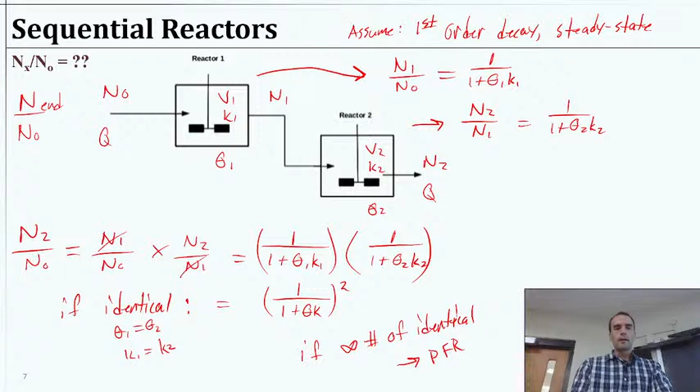We also talked about the sequential reactors, comparing that to side-by-side reactors. Talked a little bit about that problem. I'll make a comment on that in a minute. But this is just another portion for our slide there. Okay, and I need to bring up my calculations too.

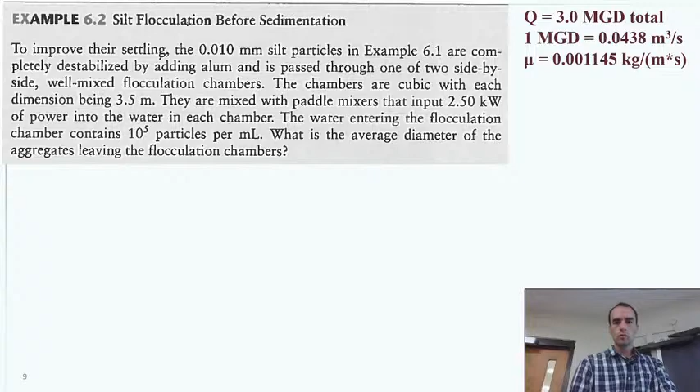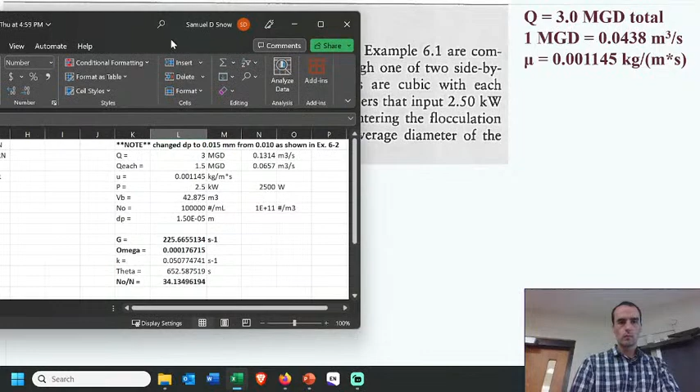All right, so you should see kind of what I have here. Let me make it a little bigger.

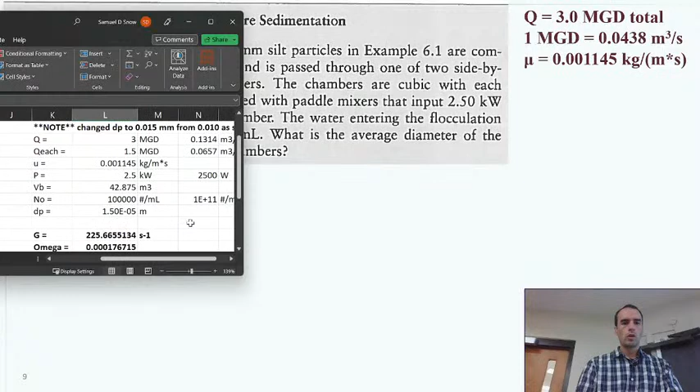You see I had Q, and I solved for that Q, halved it first, and then converted it to cubic meters per second, given the conversion factor we were given.

I just wrote up our value for our dynamic viscosity that was given. Our power, we needed to convert from kilowatts into watts, so that would be 2,500 watts. The volume of the basin is just 3.5 cubed, which is 42.875 cubic meters.

And we were given an initial number concentration of particles, I think 100,000 particles per milliliter, or 10 to the 5th. Now we actually have to convert that per milliliter into per cubic meter in order to get our units the same across different pieces. So when we initially said n naught was 100,000, we actually have to convert that to 1 times 10 to the 11th particles per cubic meter.

Then we can relate the meters across in order to solve our omega properly. Okay, so the last thing I'll say is we had our diameter of the particle. That was 0.015 millimeters, which becomes 1.5 times 10 to the minus 5th meters. So I've got that there.

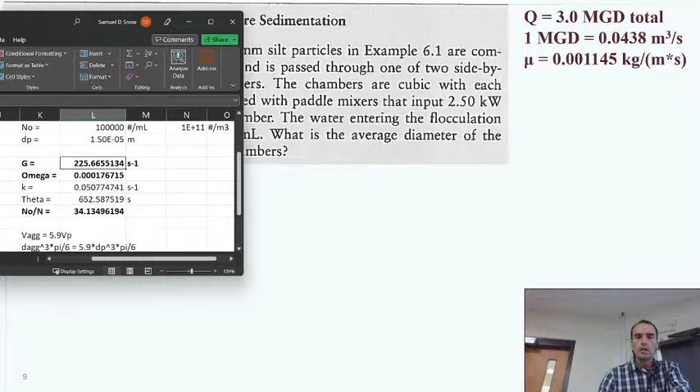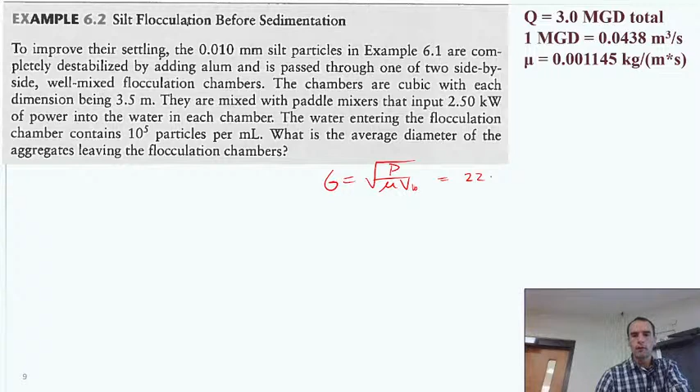So then we go on to put these into play. And so for our G, we would say G is the square root of the power input divided by the dynamic viscosity divided by the volume of the basin. Putting in the 2.5 kilowatts and converting that to watts, we should get, what was it, 225, I believe, or 226 per second. Yeah, 226.

Okay, so that gives us G. The next thing we need is our omega. This is the floc volume, right? So this is the volume of one particle times the volume of all the particles, or the number of particles per concentration. So this is going to be the N naught times the diameter of the particle cubed times pi over 6.

So when we put that in, recognizing that we need the diameter in meters and the number concentration also in meters, that should then give us this value here, which I'm going to convert to scientific notation. So 1.77 times 10 to the minus 4.

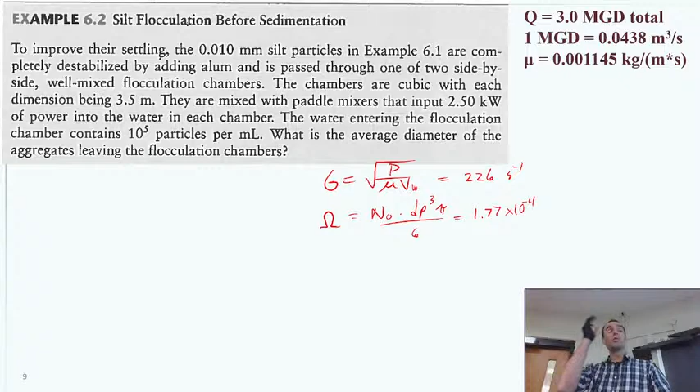There's no units on that one because it's just a portion, right? It's like 0.0177% of solution is particles.

Okay, so then that gives us the ability to solve for K. You recall that's going to be the collision efficiency. The collision efficiency was inferred to be 1 because we were told it's completely destabilized. If I can find the cursor... that tells us that this term is 1.

If it was partially destabilized, then we would need to find some number for that, or be given a number for that. Okay, so we've got that times 4.

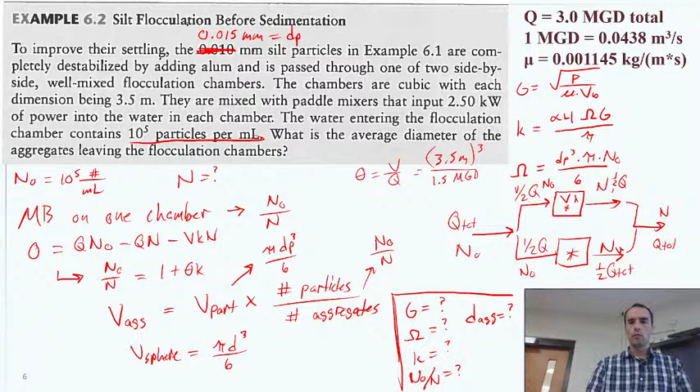What is this? This is times the G. And just so I don't forget, yeah, 4 omega G over pi, that's right.

Okay, and given that, we can add in all of our pieces and say, when we solve for K, that K is going to be 0.05 per second, maybe 0.051.

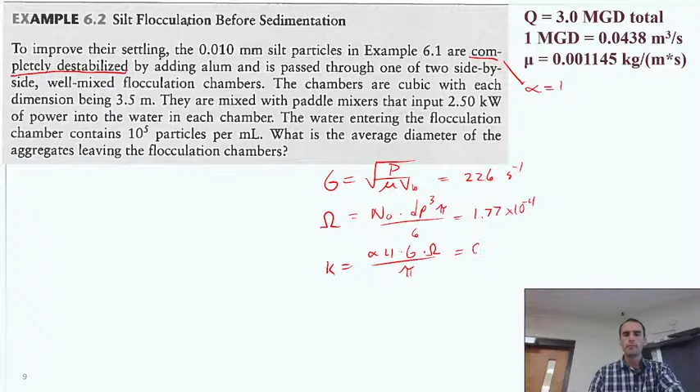Okay, so far this is just plugging things in and putting in the numbers, but with attention to converting the units properly, right? There's not actually anything too fancy about any of these pieces.

So then we can also solve for theta. I mentioned that earlier. We can get the Q for one reactor. It's V over Q, and that turned out to be 652, we'll say 652.6.

Okay, so now we have basically everything. We already derived earlier that the mass balance started as a steady state, Q coming in, Q going out, minus that reaction, that yields us, with some simplification, 1 plus theta K. That was, if we solve for that and do the algebra, what we should get.

From there, really all we have is the two numbers to plug in. So the deal with this type of problem, there's a lot of units to track and handle. Then there's a matter of putting it into the mass balance and recognizing how the mass balance fits in to give us a relationship between the initial and final particles. That's what we're really looking for, is that relationship. Then we need to know how to apply that relationship.

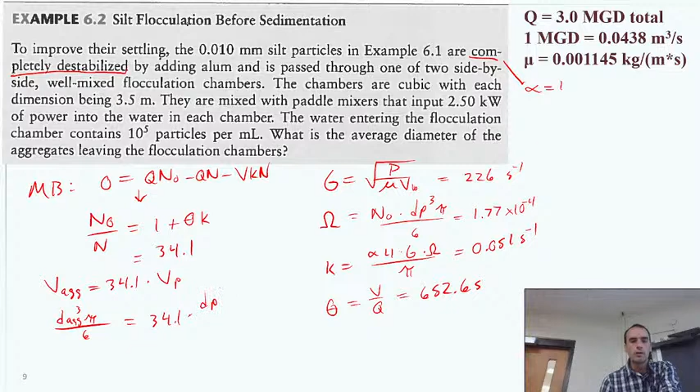So then, if we're trying to find the diameter of the particle, we can recognize that, assuming it's a sphere, that's diameter cubed, pi times diameter cubed over 6, for the aggregate. That's going to be equal to 34.1 times the diameter of the particle, which we know something about, times pi over 6. So the pi over 6 terms will just cancel, and we're left with a relationship between the two diameters.

So we can say the diameter of the aggregate should be equal to the cube root of the diameter of the particle cubed divided by that, times the 34. Does that make sense?

And we can solve that and get our diameter for the aggregate. We can put it into millimeters for an easy comparison, or we could leave it in meters, but here that would be 0.0487 millimeters.

And if we compare that, it should definitely be larger than what we started with. What we started with was 0.015 in this case. Change to that. And sure enough, it is 3 to 4 times that. So it is larger—it should definitely be less than 34 times larger because of that cube factor.

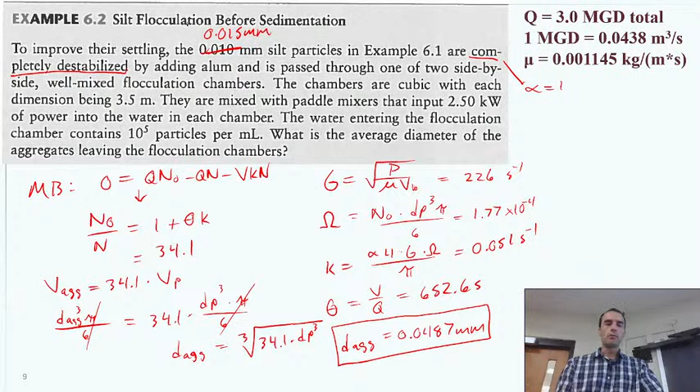So if we think about what happens in a batch system, let's imagine we just have some bucket and we can stir it for a little while and then stop stirring and let it do sedimentation.

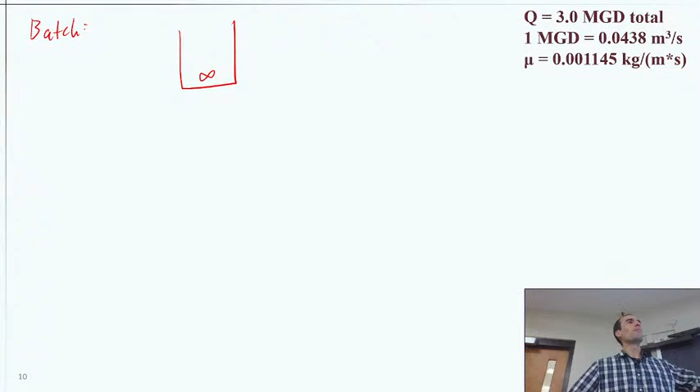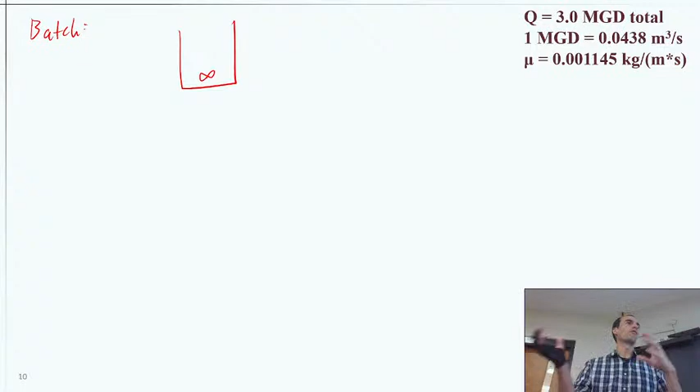So we could think about a problem that would be: you have all the tools here to do a batch flocculation and sedimentation, right? This is the way my brain works when I think about assigning problems or designing exams. You have all the tools now to do sedimentation, you have the tools to do flocculation, you have the tools to do this in different mass balances. We covered the CSTR case, well how about the batch case, right? That's even simpler in some ways.

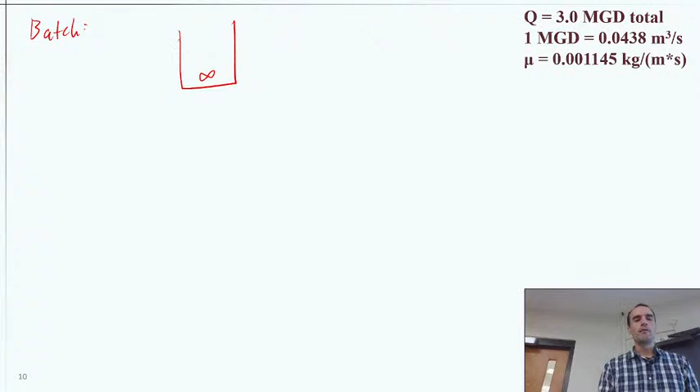So how about a system like this where we have something, maybe 10 liters for volume. We could make up some numbers here, we could use some of these numbers given, let's just ignore those pieces. I'll walk through the steps to solve this one, not do the whole solution, but I'll sketch it up real quick as if I was creating a problem.

Okay, so let's say we're gonna estimate power. We can get maybe a 2-watt motor, solar powered, just something a little mechanical stirrer of some sort, or just by hand. And let's say we decide that 10 minutes is as much as we're willing to stir the little pot, right?

I have no idea if these numbers are going to be realistic. So if you go and solve this, bear in mind that it could be a little distorted in terms of the numbers, and so that would be something I would want to check first.

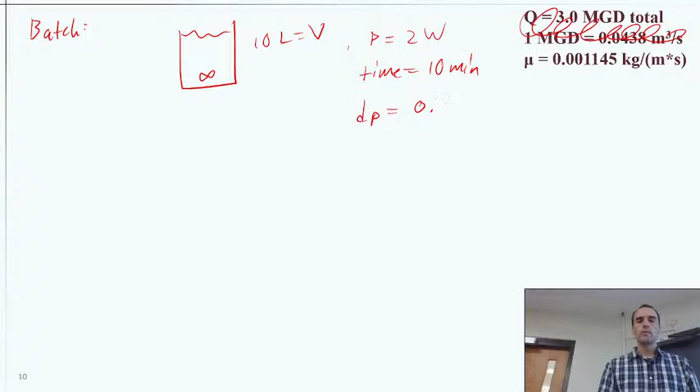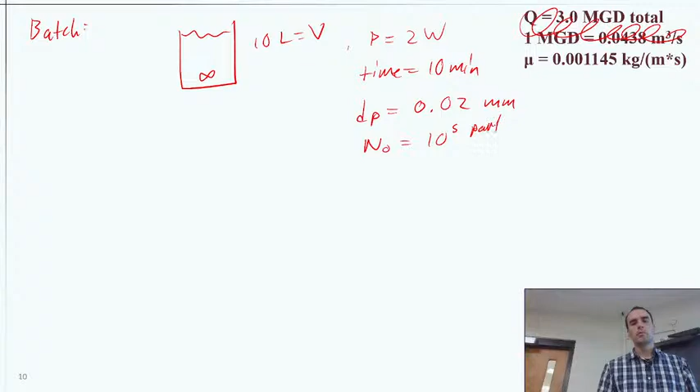And let's say we have similar particles. Diameter particle would be, let's say, 0.02 millimeters. And what else do we need? Some number concentration of them to start with - that 10 to the 5th sounds good to me, particles per milliliter. So we can just use the same one as last time.

By the way, as an aside, I think some of you asked me this last time - that might have been the other class - but we never solved for n in the last problem. We don't really need to, typically. I guess we could, but generally we just need it as a proportion, right? So if you're finding yourself trying to solve for n in these problems, it's usually you're getting distracted, and you actually don't need that.

So in this case, once we have our problem defined, and maybe there's something else we need to define, we would think about: how fast are these going to settle? Maybe that's the question - once we do the flocculation, how long does it take before these particles settle? That could be a question that combines the flocculation with the sedimentation, right? So we would start by trying to figure out, okay, how big are they going to get? It's exactly the same process as last time, but now we have it in a batch system.

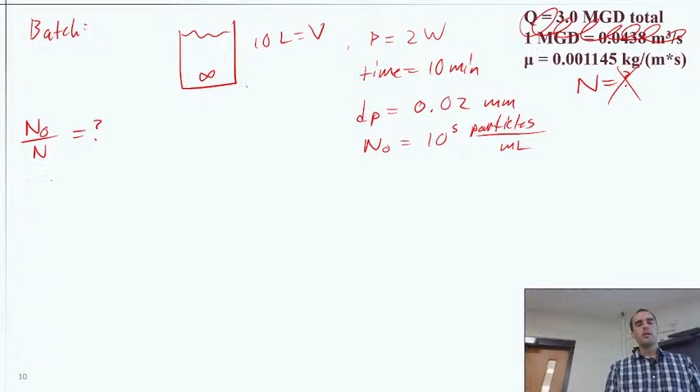So in a batch scenario, again, we have some K for the collisions. So we'll need to solve for the G, the omega, the K, all that, for our mass balance. And really it's the G and the omega to get the K that goes into our mass balance, right? You can think about it that way.

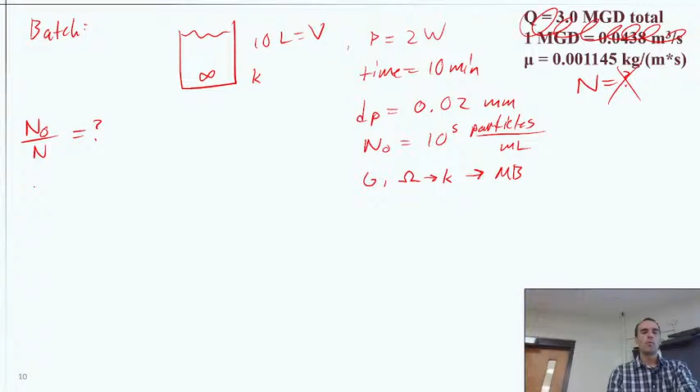And the way we'd write our mass balance in this case, since there's no inputs or outputs in that volume, we have some change in N over time, and we define that entire change just by that decay reaction between the particles. So that would be a first order decay. We've seen this before, and normally we solve it for N or for N over N naught.

So just as a quick reminder, the way we'd go about this: we'd simplify, get rid of the V's, we'd separate the integration parts here and say dn over n, divide both sides by n, equals negative k times dt. Then we integrate from some 0 to time t, and from some initial condition with n to some final condition - we started with some amount, we're going to end with some amount, how do we compare? So the integration here turns out to be 1 over x dx is the natural log of x. And so we'll have natural log of n minus the natural log of n naught equals negative k times time. Here we can do some simplification.

Well, first of all, the natural logs can become n over n naught. We can combine them that way. And then we could raise e to the power of both sides to get rid of the natural log, so we get n over n naught equals e to the minus kt.

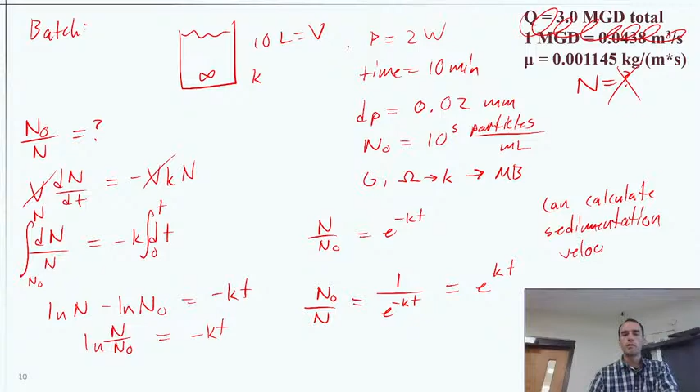Is that enough? So just as a little reminder, we can calculate the sedimentation velocity, this Vs, for both, before and after that.

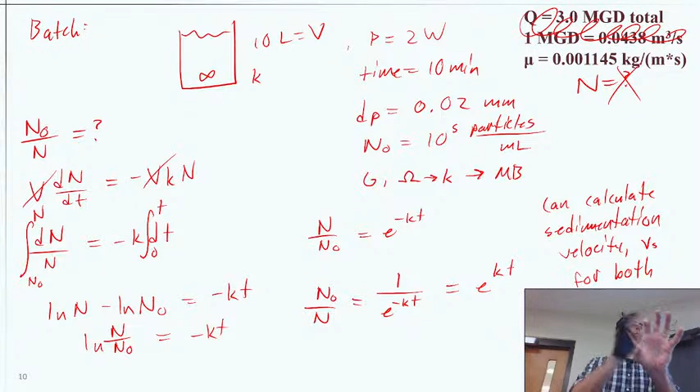Okay, does this make sense how you'd approach it in a batch instead of a CSTR? Kind of, this is what I was talking about early on when I'm saying these mass balances, once we handle them, we're going to see them in a lot of places, and it gives us some flexibility to do a lot of things with them.

Okay, so speaking of that, I'm going to take a moment and just come back to this little problem I left you with last time. At least a couple of you went on your own time and did some solving for this particular case. And you were thinking to yourself, well, my n over n naught, or my n naught over n, wasn't really a big change here. Is that weird? Is that wrong?

And this was not even a flocculation problem. This was just a generic mass balance problem. So we had some growth reaction here. All I will say is we're considering bacteria growth. And if you know anything about food safety, or if you remember back whenever you might have taken a biology class, bacteria have a doubling time that's something like, the fast ones maybe an hour, hour and a half kind of thing, right?

So 90 minutes, pretty typical E. coli. So overnight or over the course of a hot sunny picnic, some bacteria growing in your food over the course of 5 or 6 hours, you can get a big problem. But let's just take a quick look at how much time we're giving these in this hypothetical here.

The theta, that V over Q, turns out the volume was 8 cubic meters. So in total, in the whole system, we'll say that's 16 cubic meters. And the flow rate here was half a cubic meter per second. So even through the entire system, that's 32 seconds.

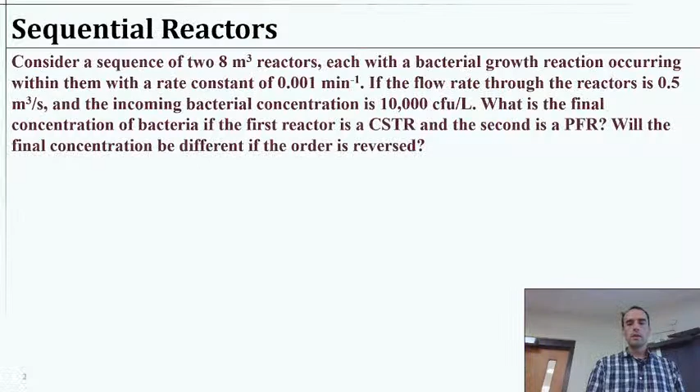All right. So that's it for the content that's going to be on the exam next week. And I have a few slides, probably go fairly quick, and a couple videos to give you the context of our next segment. So we really won't be going into any calculations today, so you don't have to stress yourself about that side of your brain as you prep for the exam. I hope to avoid any confusion there.

But I want to give you the topical understanding of what is granular filtration. And so when we come back after the exam, we'll hop right in and start investigating that.

Okay, so we're actually going to talk about two different types of filtration, one being granular and one being membrane. So a membrane, by definition, is something that allows some stuff through, but not everything. We talk about cell membranes. We talk about membranes in a lot of different contexts.

In water treatment, what we're talking about is basically something that kind of looks like a very fine mesh, or something that just has some very small holes in it. So we pour water through, and any particle that was in there will get stuck on that surface as it makes its way through.

It's a size exclusion. The particle is literally too large to make it through the space. That's primarily what we're talking about with membranes. On the physical side, it gets a little different when you go so far down you're dealing with reverse osmosis for desalination kind of stuff, rejecting actual atoms. You're kind of doing size exclusion, kind of just chemistry and thermodynamics. But we won't worry too much about that. Primarily, it's a size exclusion.

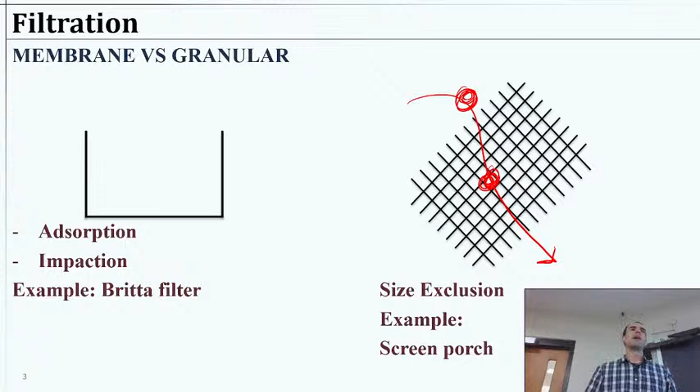Even like a screen for a window or a porch is designed to be a membrane that allows fresh air in and keeps mosquitoes out, basically, and other bugs. That's the hope for a screen porch.

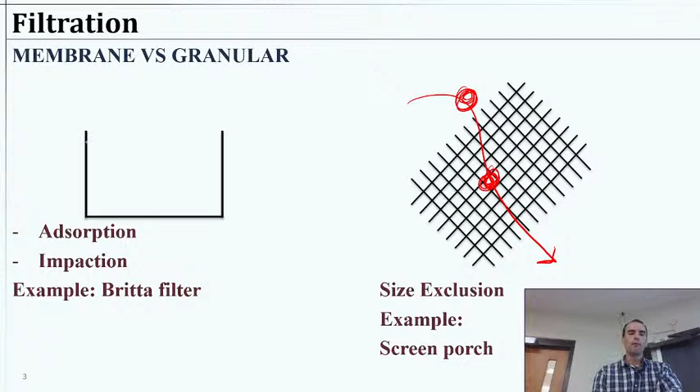For a granular filtration system, which we'll talk about first, it's a little simpler. We have some water, and we're going to stack it on top of some sort of a bed or chamber of sand grains. It would be a lot like doing artificial filtration with groundwater. Groundwater gets filtered because it's working its way through all the particles, the soil. Naturally, particles will get stuck to things along the way. Large things will get removed. Generally, water's flowing through the ground and having some treatment, some filtration in that manner. So this is an artificial way of doing that, where we pour water on, it fills up on top of this bed, and then gravity pushes it down through the bed.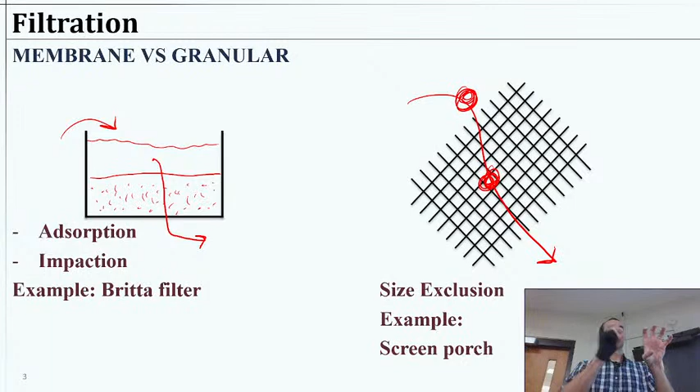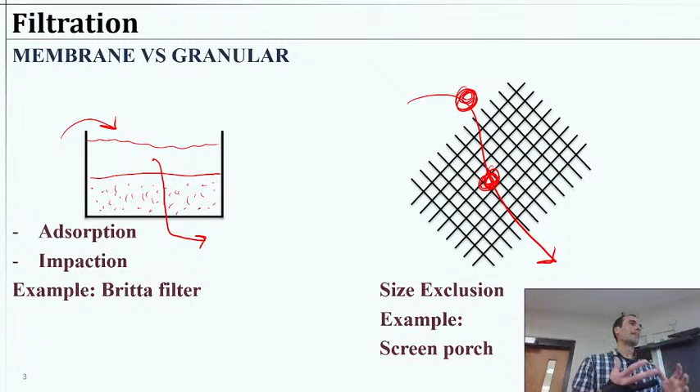What we're really doing here is not so much size exclusion. A lot of the particles could make their way through the pore sizes. If we're talking about a really small particle, let's take this little piece of chalk, and then maybe my fist is a sand grain. So these are pretty small particles that could make their way through, but on average, they tend to have so much interaction that they might stick to another particle, they might stick to the side, and theoretically we've already destabilized them with coagulation, so they're already pretty sticky and ready to find some surface. We actually use a lot of adsorption type phenomenon.

If we do have a large particle that made its way in, that might get mechanically screened out, but generally we've probably done sedimentation. That's not really what we want to be doing, so that's not the primary mechanism, especially because we don't want a layer of small particles just stuck on the surface, because then it's really hard to push water through. We're kind of blocking all the pores.

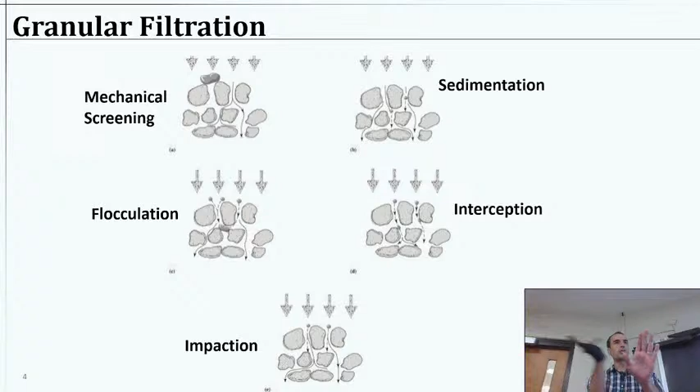So sometimes we might have a little internal flocculation happening inside, where one particle meets another, sticks together, and they're a little larger. Maybe then they're size excluded. Maybe they're just sedimenting as they make their way through the channels - it's like a whole bunch of tiny little sedimentation reactors. It can just fall out of solution and land on the next sand grain. Maybe it's intercepted - the particle is kind of flowing along, and it just hits the wall. Or maybe impaction - the water through the pores makes a turn, and the particle is too heavy to make the turn that quick, and impacts on the sand grain. So all sorts of little ways to think about why this works to separate the particles. A lot of it may be pretty intuitive - just a mixture of these different things happening.

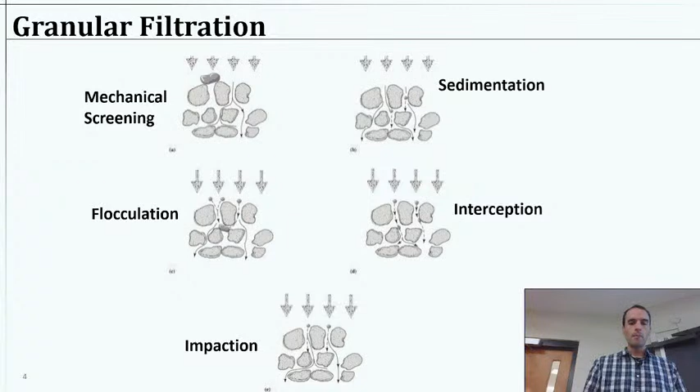In practice, what this would look like, we can put it in two different contexts: one is gravity driven, and the other is pressurized. We might see some sort of a treatment plant, or even your swimming pool might have small cylindrical looking filtration units, and chances are pretty good that they're packed with sand or maybe some activated carbon granules - kind of like charcoal, but small.

The carbon filtration, the activated carbon, tends towards allowing molecules to stick. Something like if you had some benzene in groundwater from petroleum contamination, you'd probably pump that up through an activated carbon filter because the benzene would be sticky to it.

I have in my lab this pilot filtration system with 3 columns here. They have a mixture of sand type stuff and activated carbon kind of stuff. So if you're curious, I can show you. We just have it set up to treat the tap water - we're not actually using it for research. It was sort of donated for teaching purposes. So if you are fascinated by this or want to come see it, let me know.

We might actually be loaning it out to do a study on different water treatment techniques for St. Tammany Parish. They have a new well water supply and they're trying to figure out the right treatment for it, so this might get some field action pretty soon. Let me know if you're interested in any of that, and I'll keep you in the loop.

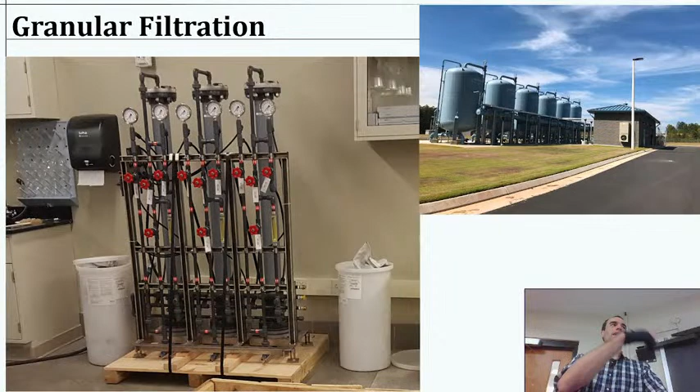It's kind of neat because we can send it through the backwash cycle and see all the particles kicked up. We haven't really cleaned dirty water with it yet, but just like when you first run a Brita filter, there are little sand grains or little black specks, small particles that happen to be there that might come out at first. You can see those backwashing and coming back out. It's a pretty neat thing.

Otherwise, the more typical setup, at least for drinking water, would be to fill up a large area, kind of like a swimming pool, and layer sand grains down at the bottom. You'd have some sort of support system, maybe larger grains to hold up the smaller ones, and run water basically vertically down through it, with a way to distribute water on top and let it push its way through. We'll see a couple of examples of that in a few minutes.

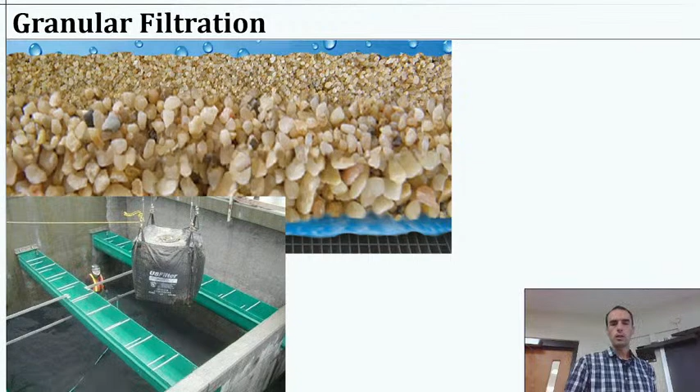Okay, it might just look like this, like some water sitting there. You're not sure what's going on, but this is active filtration, where each one of these could be a filtration bed. It looks like you can actually see under these walkways, so maybe these are the beds shaped like that. Regardless, that's kind of what it would look like in some sort of treatment plant.

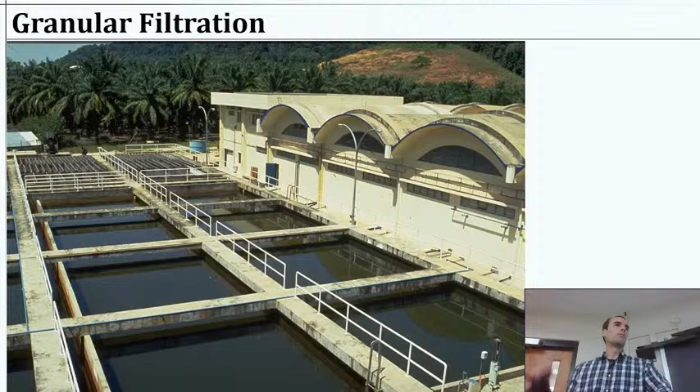Okay, so a quick bit of context for granular filtration in general. These days we would call this rapid sand filtration, a common term for it. Even if we're not using sand, it's essentially the size of sand grains, so this is a catch-all term for that.

Rapid is just a term we use because the alternative, which we started using back in the 1800s, is to pour water over a bed of sand and let it slowly seep through, letting biological processes handle some of the junk in the water. That's a lot closer to an artificial groundwater kind of situation. Normally we try not to need biological processes for drinking water because that means there's a lot of junk in there, and we're also growing more bacteria. But if you had a better way and some stuff in the water that needed to degrade, that could be a possibility.

Okay, so these days the only time a slow sand filter would ever be used is specifically for biological treatment in a resource-challenged area where it makes sense to flood a bed of sand a little bit and let it do its thing.

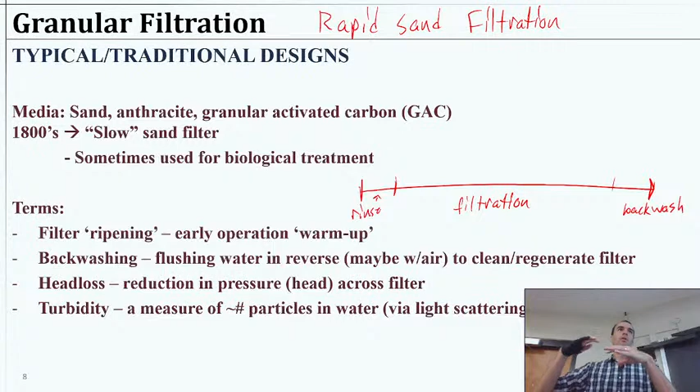So what we do to keep a constant flow is we give it a constant flow, and then basically gravity adjusts for us and says, okay, well, if it's not flowing as fast anymore, the water level will just build on top of it to pressurize it and push it through to keep basically a constant rate of water going through. So it's actually pretty convenient that we can just load the water on, and it's doing that filtration and accounting for this head loss, the loss in pressure, or the increase of pressure drop across the filter, to keep our filter operating like we want.

Last one would be turbidity. We've talked about turbidity already. Basically it's a measure of how many particles are there, and we want to be monitoring turbidity over time to make sure that as we're doing the filtration, if we see a certain condition that particles are making their way out, we would stop and backwash. That would be an indicator to say, okay, now it's time to stop. So there's really 2 or 3 indicators.

We'll talk about them in a little more detail, but to know when to backwash could be just a time limit. At some time we decide every 24 hours. We'd also be monitoring the turbidity. If we're getting particles coming out at some level, we're going to stop. It's not safe, we need to stop that treatment.

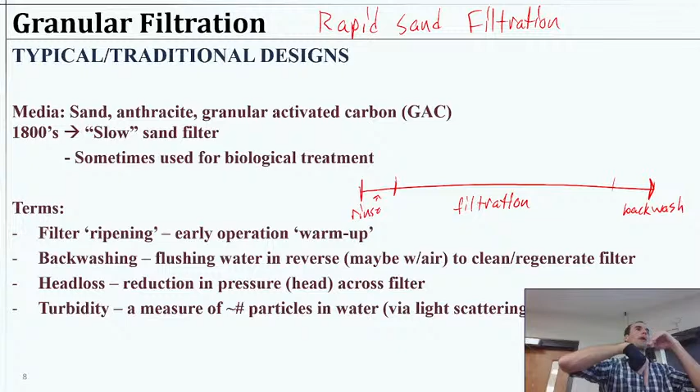And then sometimes head loss. If it takes too much pressure to get water through, we run some risk of channelizing the filtration bed, creating a fissure in the sand. It'll kind of push it apart and create a direct route for water to go straight through. That will also make it so a lot of particles are just going to fly right through.

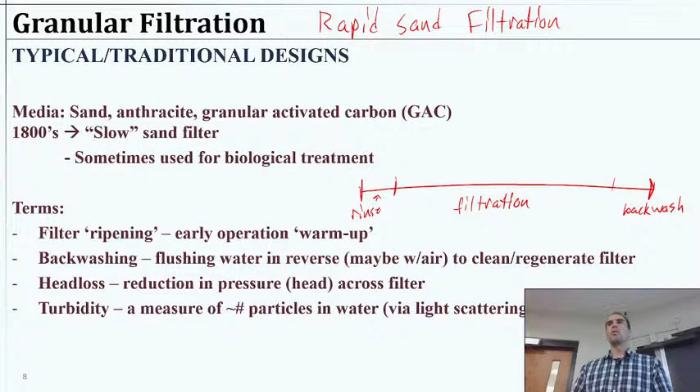So if we're monitoring turbidity, we should notice if that were to happen. But usually in practice, the types of sand you're using are rated for some amount of pressure that they can generally handle with no problem. So you keep your operation within that limit.

So that high turbidity backwash scenario, we're definitely sending that to wastewater treatment and not reusing it, not doing anything with it. That's kind of removed from our system. That also means, as we'll see later, that we are actually treating some water, and then we have to use that treated water to wash our filters. So there's some amount of water that we produced that is now wasted because we have to backwash it.

So when we do our calculations later, what we'll really be calculating is, on the whole, how much water are we getting for each filter? And how do we account for the time it's spent not filtering? How do we account for the volume of water we wasted that we had already filtered? And likewise with the rinsing, we also have to send the rinse water to wastewater, because it's also coming out with too many particles.

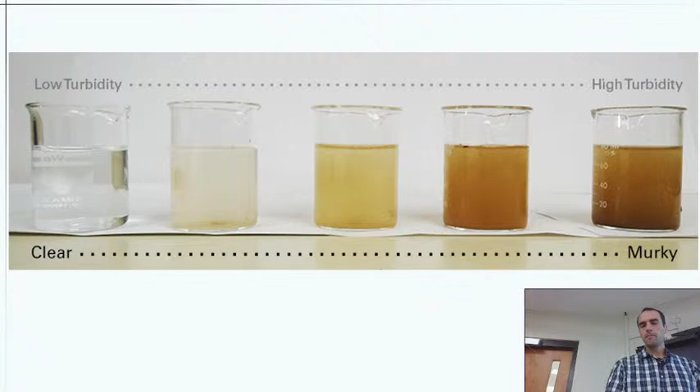Okay, so turbidity is just that light scattering thing. We already talked about that, where you can use this one metric to see how far down you can actually distinguish the colors, and use that to tell how many particles are in there, because the distance the water is traveling gives us an amount of light that's going to be scattered given how many particles there are. So if you were to drop this kind of thing in a very murky basin of water, it'll disappear rather quickly. If you've got really clear water, you can see it pretty far. Sort of just visibility.

Okay, so I mentioned this, but the keys to say when we're going to backwash, we almost always use turbidity limits in addition to one or the other here. So sometimes we might use head loss, sometimes a time limit, but I think our regulation says we should always have turbidity monitoring going on.

All right, so if we were to track turbidity over time during a filtration cycle, we would actually see during the rinse—and what I'm going to do is go from rinse to some cycle end point. We'll find that in a moment. And we're going to have some limit, some turbidity limit here.

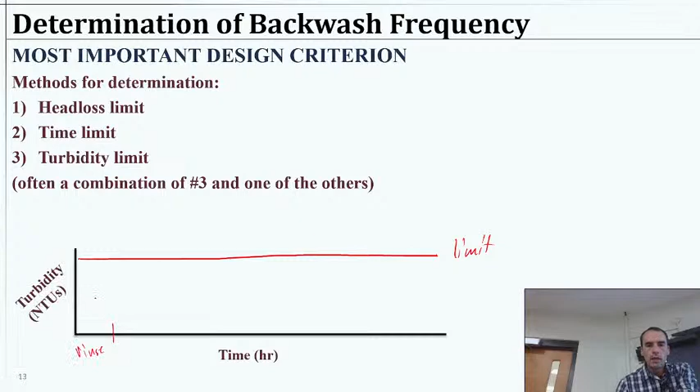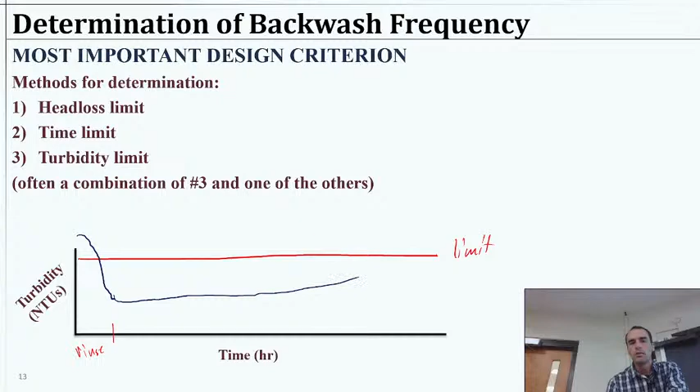If we look at what's happening during rinsing, we're probably above the limit for the most part, because we've got these extra particles we don't want in there. We just backwashed it, the granular media is all shaken up, and there's still some particles that are loose that we need to rinse out. So at first we probably have too many particles above the limit, but in the next few minutes it should drop to some point where we have our starting point for operation, and then it's pretty good for a while, and eventually it starts climbing until we reach the limit and say, okay, right there we've hit our cutoff, and we're going to stop treatment.

So on our timeline, all of this would be filtration, and then we found our limit, and then we have to backwash. So then we do our backwashing step. Sometimes it will not just be backwashing, sometimes you'll do backwashing and an air purge, sending some air through the media to shake things up even more, and then backwash. We'll see an example of that in a minute.

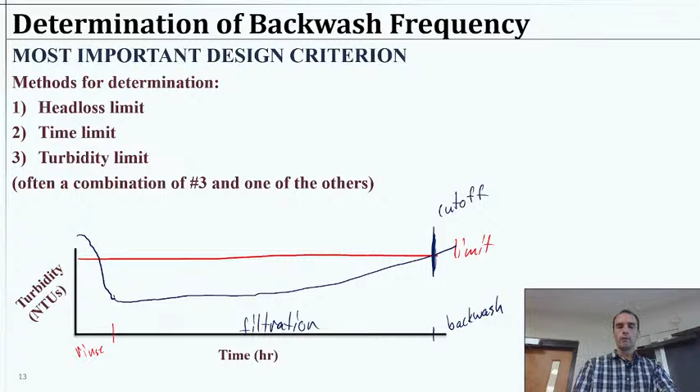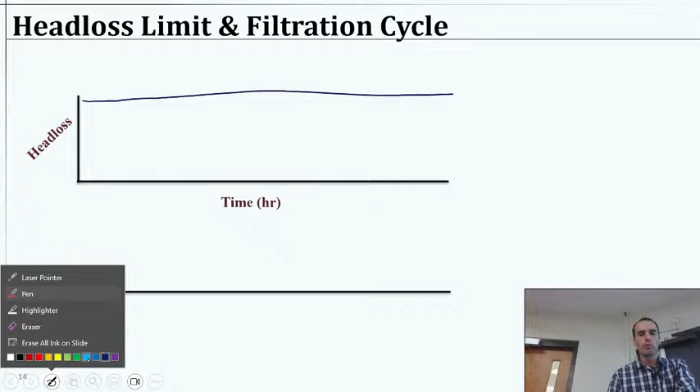Another way to look at that would be to have a head loss limit. Again, if we draw some sort of limit as the maximum we want to go through, then we track our hydraulic head. We can look at it again in terms of a rinse - we'd see that the cleanest filter has the least pressure drop. With a clean filter, even though some particles are coming out with a rinse, it has a pretty low pressure. So the head loss is lowest early on, and this would slowly scale up as it gets dirtier and dirtier. Then we'd say, okay, we just hit the limit, so that's our cutoff, and then we would do our backwash.

So in all, a typical cycle - a lot of times we'll deal with it just as a time limit, but these are the reasons or causes that help us define that time limit in the first place. So a lot of times we'll have some sort of cycle that looks like this: we'd have some rinse or ripening, usually on the order of 10 to 20 minutes, we'll say 15 minutes, then the actual filtration where we're producing water.

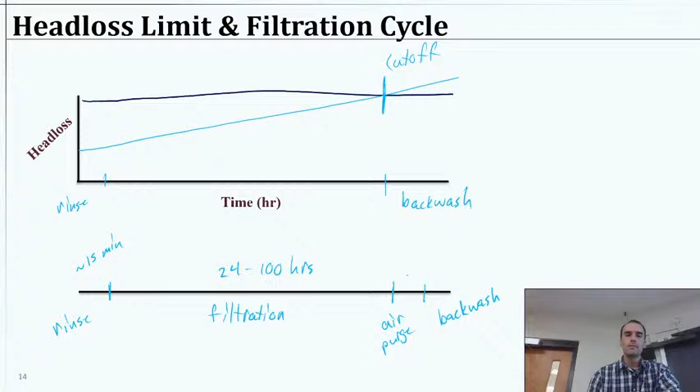Filtration is anywhere from 24 to 100 hours on the large scale. Then we reach some time where we have to backwash, and sometimes, I'll add this in here, we'll do an air purge as part of the backwashing sequence - maybe this is 5 to 10 minutes. And the backwash is probably something like 10 minutes.

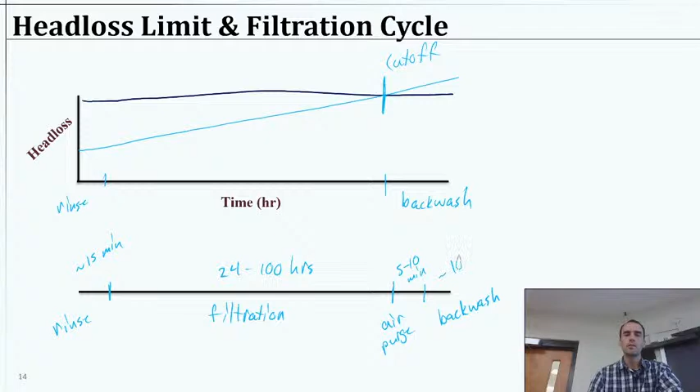So in the scheme of things, we're spending less than an hour on the rinsing and backwashing steps, and at least 24 hours on filtration or something like that. So the entire cycle time might be 24 hours. I think I've got a problem for next time that uses that number - so you can imagine we're producing good water for 95% of the time, and then taking a little bit of that water and sending it back through to rinse or wash.

Okay, so that's kind of the deal with granular filters. The math is quite straightforward - it's not even true mass-balancey kind of stuff, we'll find. But it does put us in the right thinking for a flux through some area, and that's actually going to be helpful when we talk about membranes as well.

For now, the last thing I want to show you is a couple of videos. Any questions right now, or feel free to ask them with the videos - we're just going to watch some backwashing. I'll skip through them a little bit, so we're not here watching the grass grow for a long time.

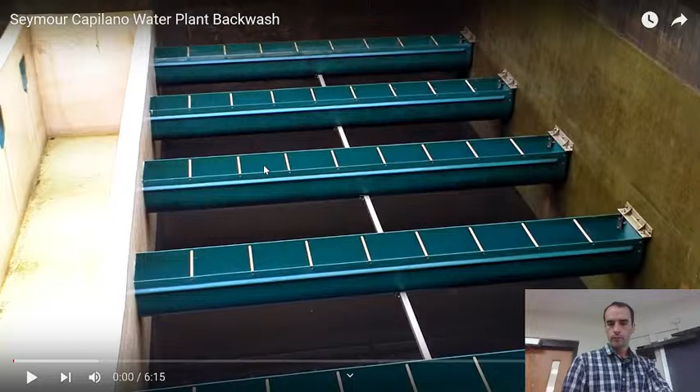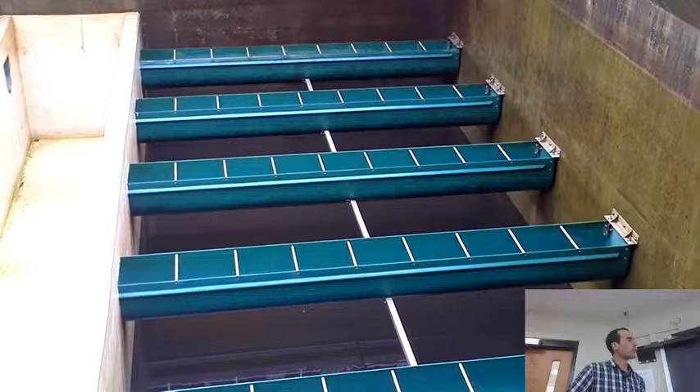Okay, and let's see about volume. So this first one is going to be air purge and backwash directly. They don't complete the process in the 6 minutes, but here you'll see the air purge is about to begin - there's water resting on top of a sand bed here. I'm going to turn off a few more lights to make that a little clearer.

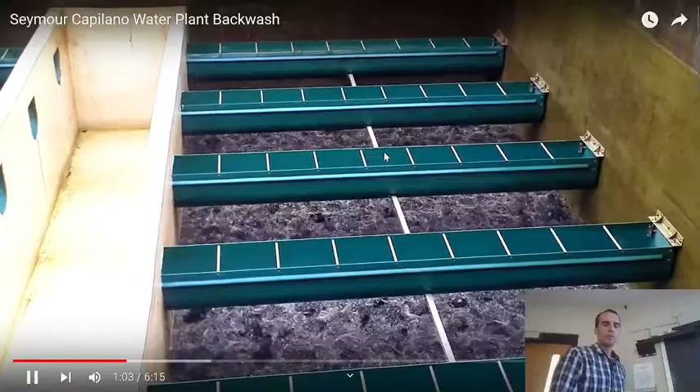So this is literally, they're just pushing air up through right now, and they'll do this for a couple minutes, and then they'll have to purge the air out of the pipes that they were just using, and then flush with water. So I'm going to skip forward a little bit until they're done with that.

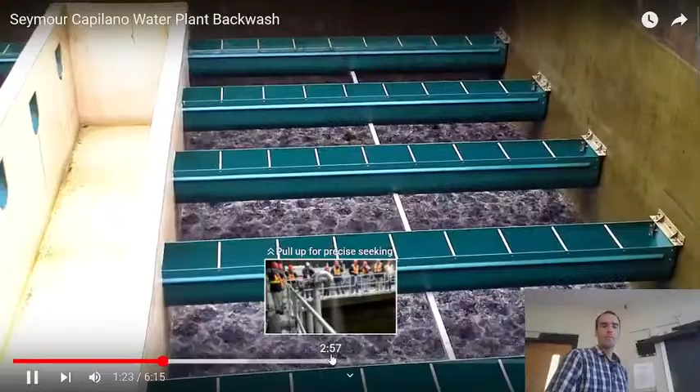It's quite noisy, and if I were to skip here right now, they'd all be mad at me because of the noise. So I'm going to try to skip past it. Nope, didn't quite make it, sorry.

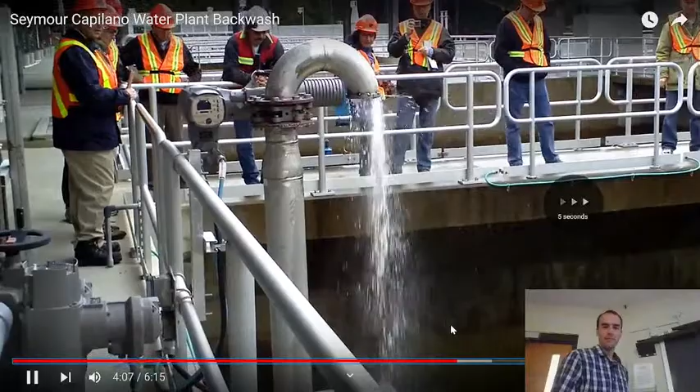Here we go. All right, so they're done with the air purge now. They're priming the pipe, and they're about to start pushing water.

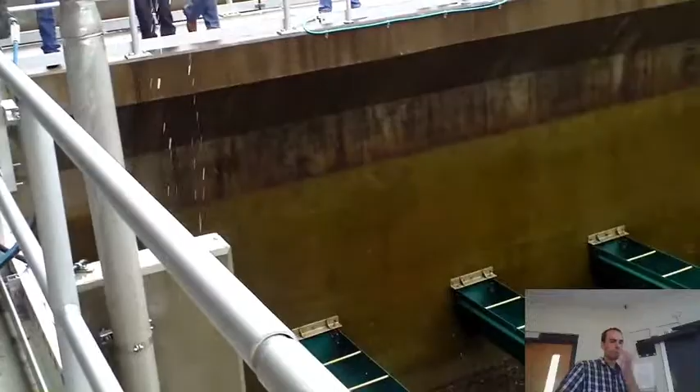Film the water for a bit. It's all brown, it's all bubbly. This is how they make root beer. Giant. This is how you make root beer. Okay, and you'll see why they say that.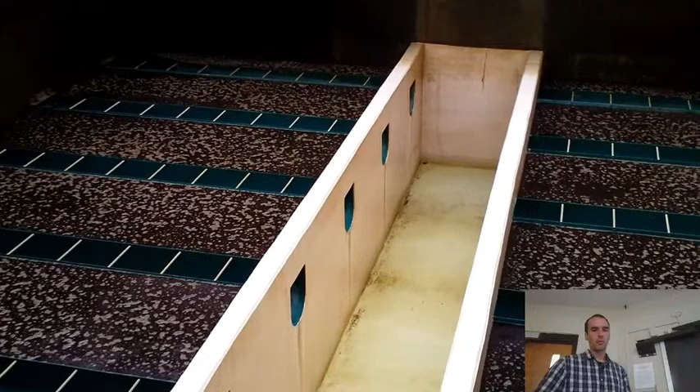So now they're starting to push water through. There's still a fair amount of bubbles. So you saw this coming out, they fast forwarded a little. Gonna do it. Oh yeah!

And now the water is overtopping. That's all those particles that were in the water and now they're concentrated in this backwash.

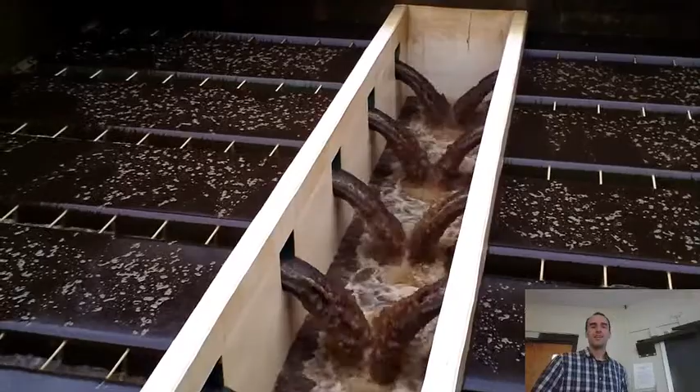The way these filters operate is that middle channel there, this is just basically two filtration beds. That middle channel, normally you flood with the water that you're treating, and it would go the other way. So you fill up that trough, you fill these side troughs, and just load onto the filters that way as we distribute water across. So in backwashing, they just reverse it, and they rearrange the pipe to send this to waste.

And so basically, they're just going to push water through it at this rate, which is a pretty good flow rate there, until it kind of clears out the particles, right? So that would probably take about 10 minutes.

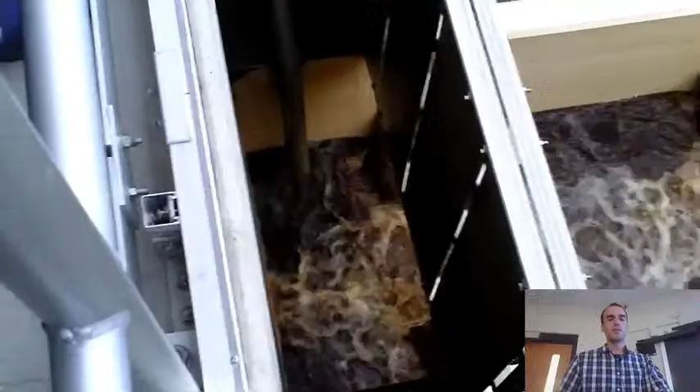I have one other video I'll jump to, and what's neat is you can kind of see that the particulate matter itself may be different colors just based on maybe the natural chemistry or organics in your area, in the river you're taking from, or maybe even the coagulants that you're using to cause them to stick together. So we'll see a bit of a different color, an example, in this one.

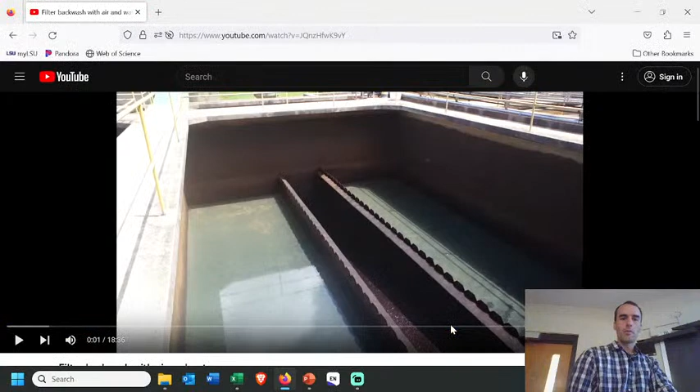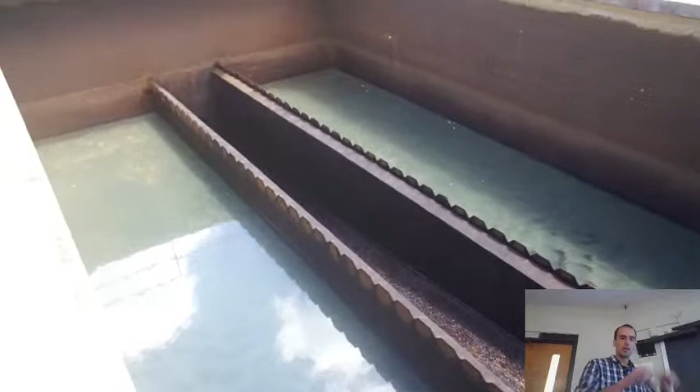And this is 18 minutes, so this is like the full cycle where I'll definitely skip around in this one. I don't think they're doing air purge in this one, so you see they've got a little bit of a different setup. It's still sort of a middle trough thing, and then a little indent to let the water overtop.

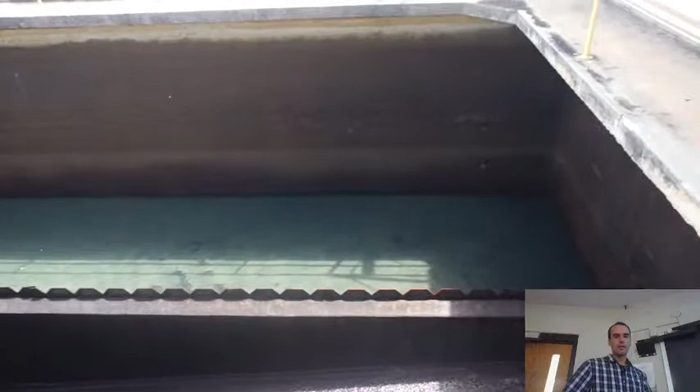Right now they're just about to start the backwash, so you see that's just the media there, water sitting on top of it. And as soon as they start backwashing, you'll see the particulate matter coming out.

Jump through a little bit. Okay, if you look closely right now, you start seeing everything sort of change colors a little bit. That's all these particles starting to just appear. So that's kind of a neat little transition right there.

Suddenly, everything is coming out and looks quite a bit different. So I'll let this go for a moment. You see it'll start overtopping these things.

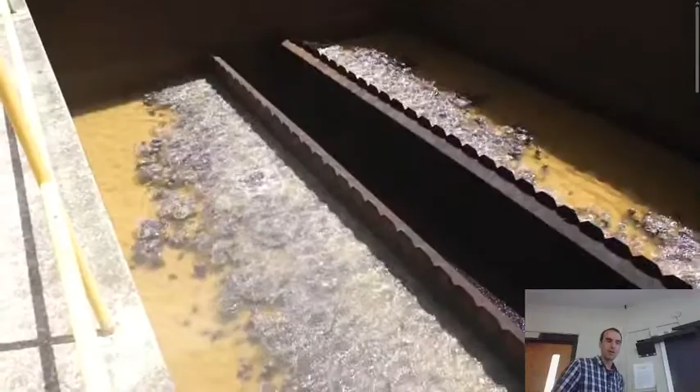Oh, okay, so they are doing air purge, I'm sorry. So that was that moment where air was starting to disrupt all of it. Okay, so I'm going to skip forward.

You can see the particulate matter here is pretty orange. Quite different.

And just like last time, at some point it's just overtopping here, similar trough scenario, trying to distribute the water fairly evenly across and going either way. All right, and I'm going to skip forward now.

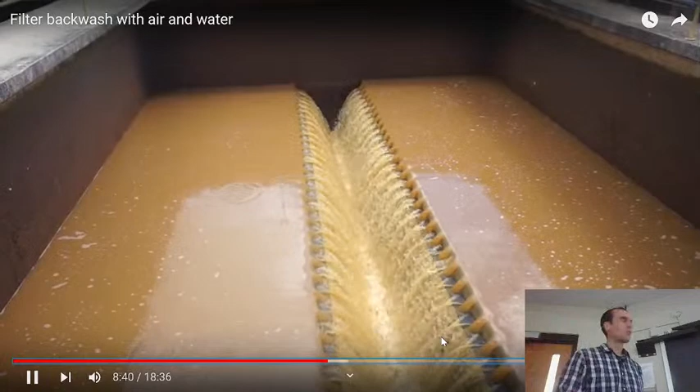You know, as fun as that is to look at, it is pretty neat to see. But what's really a little bit more interesting is towards the end of the cycle, when the filters actually start clearing up a little bit. Actually, doesn't take too long.

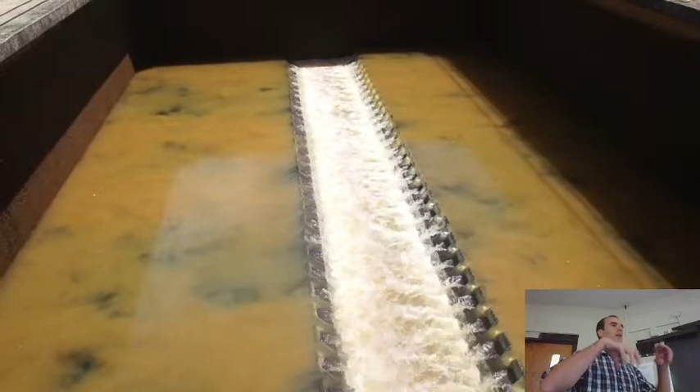You can start seeing spaces where it looks like maybe there's fewer particles, there's darker spots. And as we skip through, there's darker and darker patches where it's actually more clear water, and you're actually just seeing the media underneath.

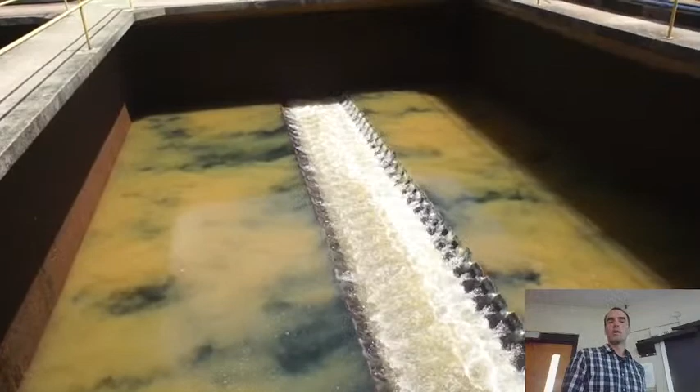And so you see there's still some particles around, but it's certainly clearing up until pretty much later.

Oops, back a little bit. It's nearly clear, and you see they stopped it here, so now they basically stopped the outlet, and they're just going to use the water that happens to be there right now, reverse the flow, and start letting water out from beneath the filters, and just do the normal filtration.

So that's granular filtration in a nutshell. That's kind of what it's all about. After your exam, we'll come back to this and talk about how we calculate each of those pieces.